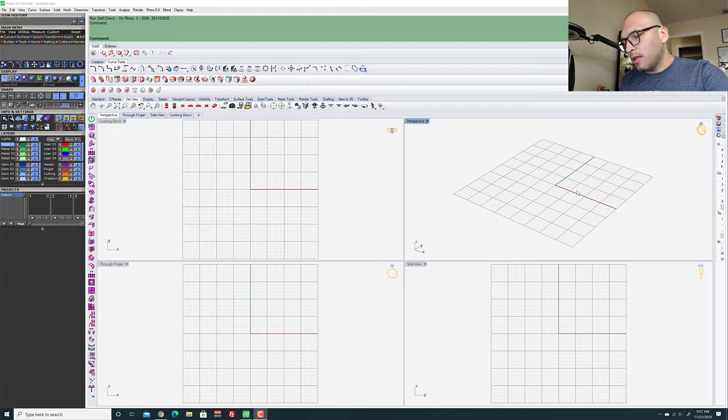In my case, this is going to be a real job that I have to do for a client. What he wants me to do is copy this Hamsa, and they're also going to use different size stones from the original.

So the first step I did was to take a good picture of this with my cell phone with good illumination, and then I send that picture to my computer.

So what I'm going to do now in the matrix is bring the picture to my looking-down perspective, so I can start drawing on top of the picture. I'm going to go to View, then Picture Frame, open a window, and search for my folder where I put the picture of the Hamsa.

I use a program called AirDroid because my cell phone is an Android, so I can send anything from my phone to my computer. Here it is.

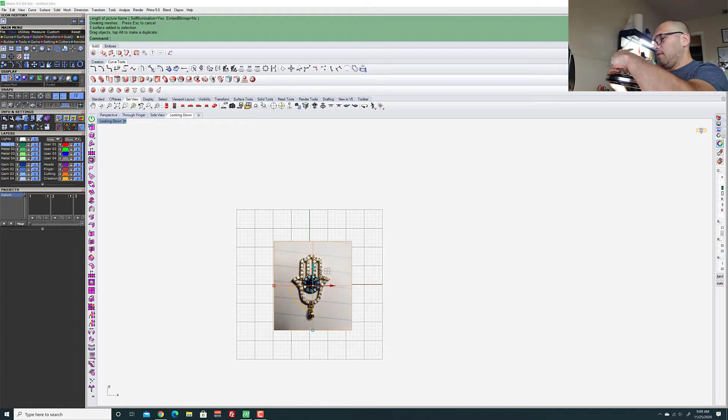And now I'm going to measure this piece. Okay, let me turn this light on. Okay, so this piece is 23.20 millimeters. I'm going to write this down.

23.20. So what I'm going to do is put a line over here, and that line is going to have that size, 23.20 millimeters. Enter, and I press shift on the keyboard and click to finish the line.

So now, selecting the line, I'm going to type a command, and the command is align. Enter. I'm going to align that line horizontal to the center, so I put 0 there. When I press enter to repeat the same command, I go to vertical center and press 0. So right now our line is in the middle of our working space.

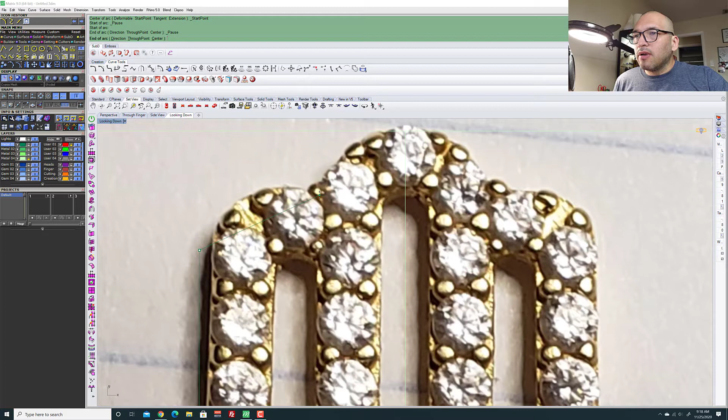So now I'm gonna use maybe the arc tool. I'm gonna place it over here and I'm gonna finish it around here. Yeah, I think that's not good.

Okay, I'm gonna unlock the picture one moment, and I'm gonna move it over here just to make this match. Okay, here we go.

I'm gonna enable control points right here, selecting the hand. So I'm gonna move this point, make it a little higher.

Right there. I'm gonna go to arc again, and I'm gonna start around, let me see, around here, yeah, and finish here. Something like that. Okay.

And I'm gonna move the hand again, so I have to unlock the layer, and I'm gonna try to put this line like in the middle of this hole over here, so right there.

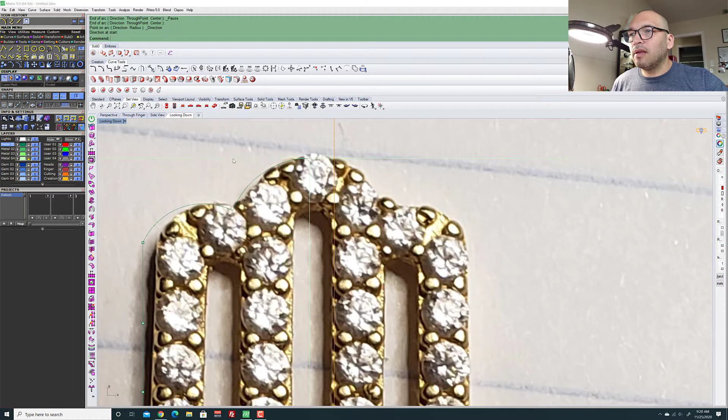Okay, so now that we have this, I'm gonna hide the picture. I'm gonna start working with this. So you see this border, in the picture it finishes pretty rounded.

So to do that, I'm gonna take my circle tool and enable tangent, and I'm gonna start from here to this curve over here. So it's gonna be something like, yeah, like that, and enter.

I'm going to select all these curves over here, and I'm gonna take the trim command, and I'm going to select this one, so I'm gonna click it, and click here. I want this one out and this one out, and yeah, that's good. So I'm gonna press enter to end the trim command, and I'm gonna take join, so I can join all those curves over there, so it can be only one single line.

Okay, yeah, I think I'm going to select the rest of the curves, and I'm gonna take the same command, join. So now I got 4 curves joining into one open curve.

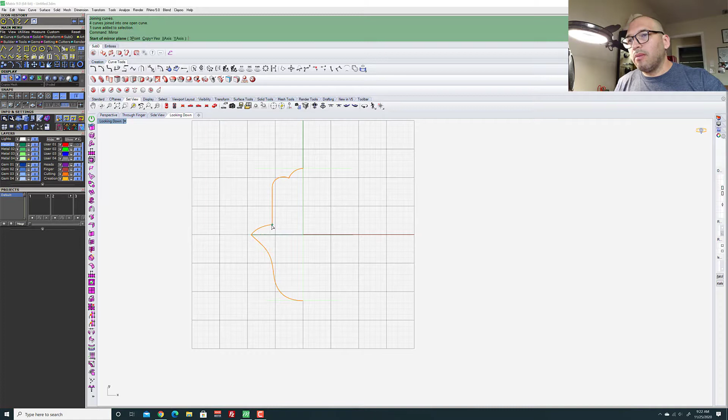And now I'm gonna take mirror, so I'm gonna mirror this left part to the right. So it's asking me for where do I want to start. So I'm gonna start over here at the end of the draw that we already made. And I'm gonna press shift and down and click to release.

Now I'm going to select the 2 curves and I'm gonna join. So now we're gonna get a closed curve.

So if Rhino tells you, if you did a join and it tells you that 2 curves joined into an open curve, then you're gonna have an error, because when you are going to make the solid, since the curve is not closed, it's not gonna be a solid, it's gonna be a surface.

So for example, let me do Ctrl+Z to go back, and I'm gonna move this one. So I'm gonna show you an example. For example, I know that right there is open. So if I join these 2 curves, they're gonna join into one curve because they're connecting down here where I have my cursor.

So it's not going to be solid because it's open in the middle finger. So when I go to solids and make the extrude curve straight, it's going to do it. But you see, it is a surface, it's not a solid.

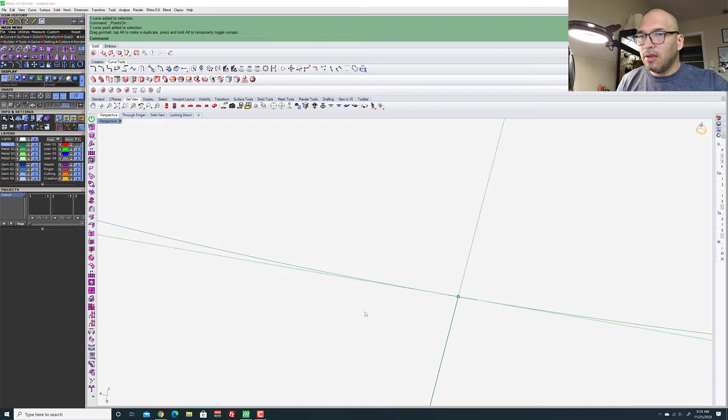Why? Because here we have this part that I didn't close. So I'm going to close it, press F10, take that control point and move it to this control point, and now it's joined. So if I do the solid again, I'm going to see that now we got a solid part. There it is. Okay, let's do the inside.

Because, like I told you before, the stones the client wants to put in the Hamsa are a little bigger. So I'm going to start putting in the stones in the borders to see how much bigger they are compared to the one in the picture, and maybe we have to make a little bigger the draw that I have over here.

So I'm going to take this round one over here. The size the client gave me for the diamonds is 1.6, so I'm going to set it to 1.6 and press this little green arrow here. Okay, it's already in our workspace. So I'm going to move this to the border, and bring the picture on.

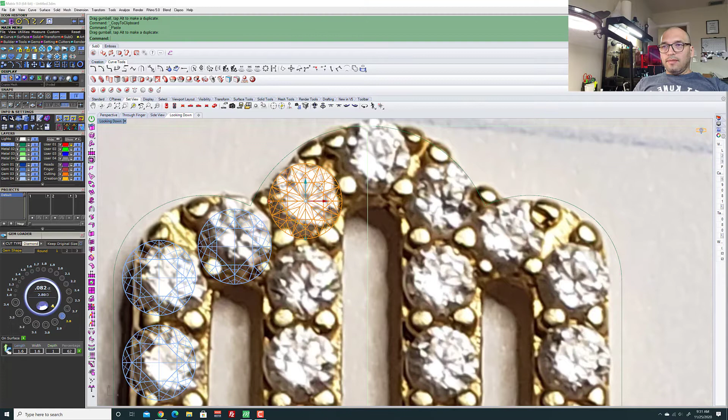Okay, so Control C, Control V, and do the same for the other stones. So this one, I know this one is in the center of the Hamsa, so I'm going to put a line in the center with my center line that I made.

Okay, also I'm gonna show you, after we finish the hand, how to do a rendering in KeyShot.

I'm losing space here, but I can see that the stones in the picture are pretty tight, so I'm going to check the piece. Let me search for my loupe. Not this one, I got a jewelry one.

Okay, let me check this one. Yeah, just these two diamonds over here are pretty close, they're almost touching each other. So maybe I'm gonna leave it like that, I will see.

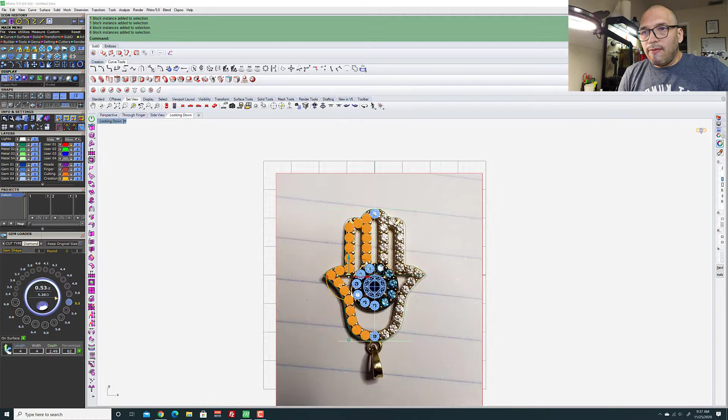So yeah, now I'm gonna select all the stones on the left side of my drawing and set them for the one in the middle. Also, I'm gonna use a group command, making just one group with all these stones, and then mirror. I can press 0 because I know my drawing is in the middle of my working space, and press shift, and there it goes.

Okay guys, so this is a very good technique, because now I'm going to group them - if I need to move this diamond, it's going to reflect on the other side too. This is going to make my life much easier. See, wherever I move that diamond, it reflects on the other part.

If this didn't happen to you in your program, it's because you don't have this history enabled over here, so you have to enable this tree for this to work. It's recording everything I'm doing, and what I mirror to the other side is going to have the attributes that this part over here has.

So if I do something in the original part, it's going to do the same in the other part, except for the curve, because this one I already joined it, so it's not editable anymore. If I enable the control points over here, let me hide the picture. If I move over here, nothing is going to happen because I already joined it, so I lost the history right there.

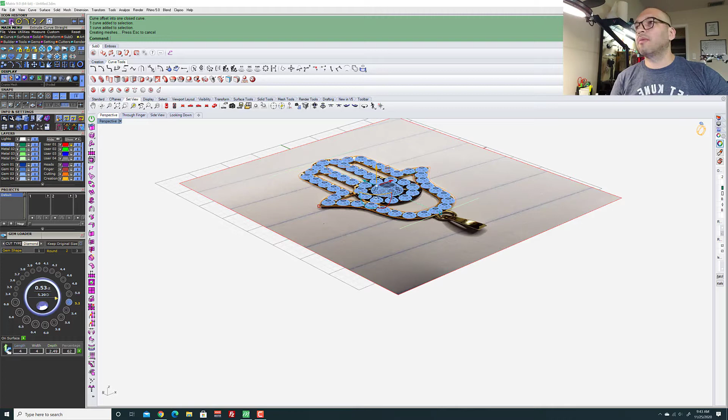I'm gonna go to - I got an icon history over here, so I already used the Extrude Curve Straight command, so I'm gonna use that again. It's going both sides all the way up and down, so I don't need that, I need to go only to one side. In the command menu options, I'm gonna change 'both sides' to no, so now it only goes to the side where I put the mouse. I'm just going to take a minus one and enter - okay, it went down, it went negative.

Okay, so I'm gonna hide the picture, and I'm gonna see how the stones look right there. So yeah, I got a little metal over here, where I'm putting my cursor, so yeah, I'm gonna edit this part.

So I'm gonna select the curve, and I'm gonna press F10. So yeah, you see why you have to simplify the control points, because when you have to do this, you have a lot of control points, and then you're gonna say, oh no, I have to edit a lot of control points.

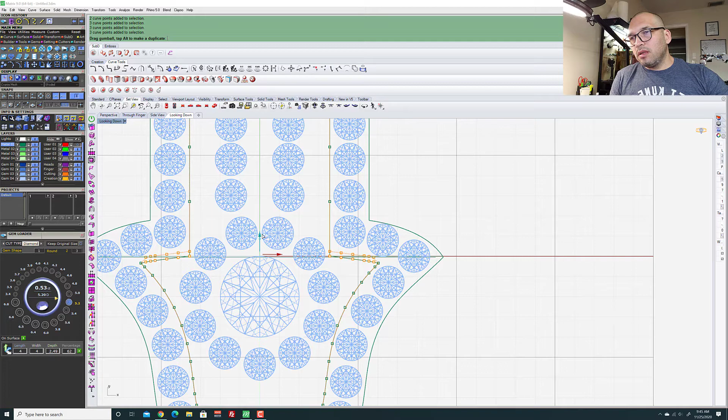So yeah, I didn't simplify this one, but it was the outside, I think, so this is a projection of the one on the outside. To make it easier, I'm just going to select all these control points, and over here too, and pull the arrow up, something like that, because here I have to leave a space for a prong. Also I need to put a prong over here, so this part looks weird, so I'm gonna start playing over here - I'm gonna delete this one and the same here, so they look the same.

But here I got this - yeah, this corner over here looks different from this one, because the control point that I got over here was the one making that shape over here. So I'm going to go Control C.

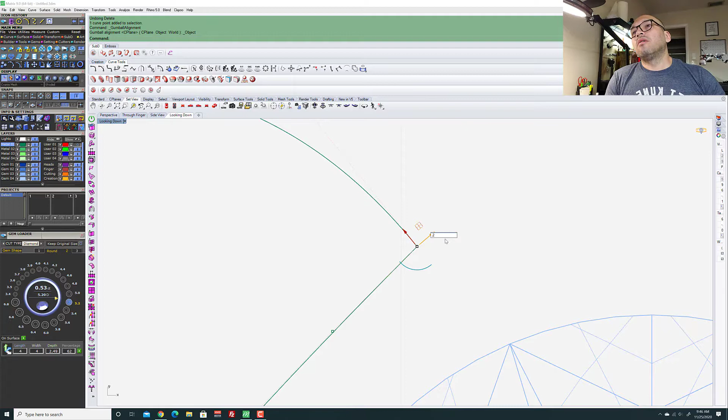Now I'm going to pull this one up, but I need to change the way the arrows are pointing. I'll go to this little sphere over here, which shows me the menu for the options of my gumball. I'm going to click that and say align to object. Now it's following this line over here, trying to follow this line that goes to here. I'll click it and tell it to go all the way up for 0.2 of distance.

So there it goes, and I have a space for a prong here. Let me see the picture. Okay, so you see it's only a single prong in there, so I got a lot of space there.

So I'm going to do the same over here. I'll select, click the red one, and go minus 0.2, 0.2, and enter.

Now I'm going to take this close to here. What I'll do is select this one, maybe these two, because here is close to the border, and I'm going to give around - let's see - click this arrow and go 0.1 maybe there.

Same for here, there, and also 0.1, there it goes. And over here, let me see the picture. Okay, we got this round here and a straight line all the way down.

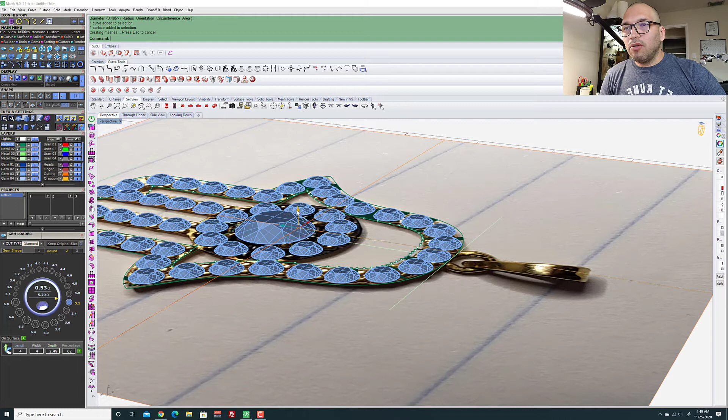So I'll click right there. Okay, and I know the circle is there, it's like behind the picture. So when this happens that you don't see the lines or the control points, just unlock your picture and go to perspective, and from the gumball put it a little bit down like there, lock it again, and from looking down now you will see the whole thing. I think I moved the circle too, so let me see.

So what I should do here is I have two options. I can go from looking down and go to transform and Project to CPlane command, and say Delete input objects yes or no - yes, because I don't want two of the same circles, I don't want the circle to be repeated. You know what I mean, repeat. And now it sends the circle to the zero in our work area. So now what I'm going to do is make this circle solid.

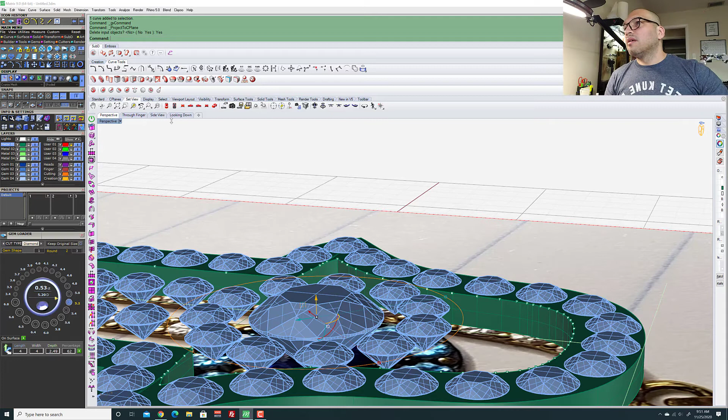Let me see. Okay, the circle in the halo that's going to make the halo is also 1 millimeter. So I'm going to go to Extrude Curve Straight, click the command, and minus 1. So now we got the circle there.

And now we're going to work with the fingers. I'm going to start making the fingers. So here what I'm going to do is straight lines also. I'll start, needed to start from here. So what I'm going to do is a guideline here to around here, and now over here I'm going to enable near in the snaps menu, and I'm going to select single line.

I'm going to go around, yeah I think, and around here. I'm going to enable both sides with B on my keyboard and enter. I'm going to go with Shift, pressing Shift. I'm going to click it right there. I think this is too tall, so I can go with the gumball, put it down.

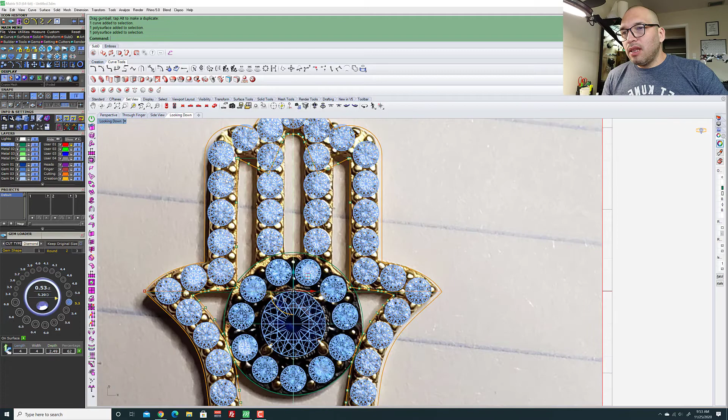So what I'm going to do is select, going to disable the control points. I'm going to select the inside curve. I'm going to put the gumball in the center, so align to CPlane, and there are these little squares over here, so I'm going to select any of these two, and press Shift on my keyboard, clicking the square curve, and move a little bit bigger the inside line, like around there. I want it to be close to touch the diamonds, like almost in the border of the diamonds you see over here. Okay, that's better.

And now the outside one, I'm going to do the same, but in the contrary, I'm going to reduce to scale that drawing. So I'm going to go inside, select pressing Shift on the keyboard, so you go uniformly in all sides - yeah, not size, side.

It's doing the same from left to right, from up to the down part to the bottom. So you see over here. Now I don't have metal in this border, so I'm gonna enable the control points and fix that. Also over here, I'm gonna take this diamond down.

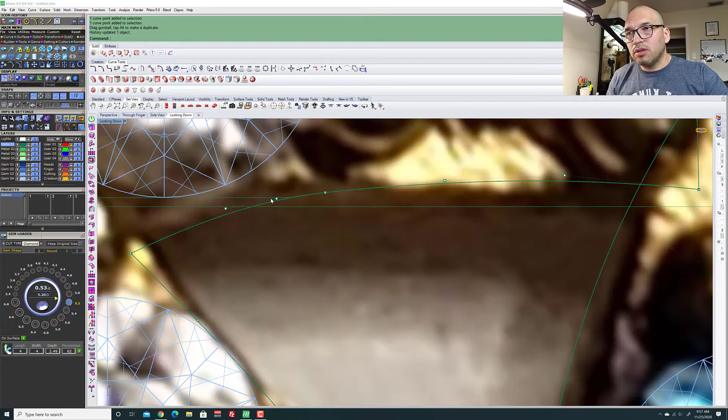Yeah, maybe this one and this one and these two, down like that. This one and this one a little up. Fixing the shape over here. Maybe I can delete this one and this one. See? Yes, that looks very nice.

Okay, over here I'm gonna enable again the control points. F10. Select the curve and F10. Again F10. I'm gonna take these 3 control points and bring them up there. Let me see the Hamsa. Yeah, just like that.

And what else? Okay, over here, let me see what I got in this part. Yeah, you got a lot of bad job in that part in the original piece. You can see like they put a screw there maybe for the casting and they left a little piece of the screw right there. Or maybe they soldered - they put something there, it's a little piece of metal. So I don't know what happened.

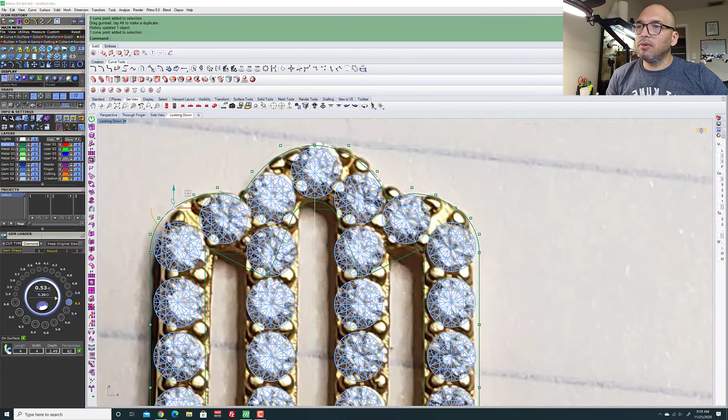This, I think I want more round, because maybe moving this point over here, this one over here. Always check if the gumball is in the middle line. I always trace a middle line, so I have a guide to know that I'm working uniformly on the 2 sides when I don't have the history working. So I'm going like that, and now these 2 guys over here a little bit up.

Okay, let me hide the picture. Okay, this one go a little bit up, a little bit up, just like that. Yeah, I think that's good. Okay, so now I'm gonna move this one over here, like in the middle of the stone over here. Okay. Yeah, I think that's good.

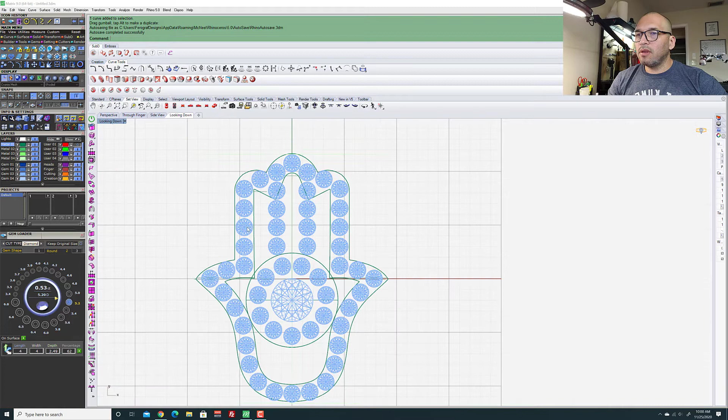Okay guys, so now I'm gonna draw the lines that are gonna go all the way down. I'm gonna use this part of the hand also. So I'm going to have to delete the solid that I have right now. I'm gonna use the single line, clicking at the end of this line over here, and go all the way down, entering the circle over here.

Okay, let me see the picture again. And I have this curve over here. So let's do the one in the middle. I'm gonna go for the single line again, and go the way up over here, or maybe - okay, let's trace it from here inside the circle, and I'm gonna mirror these 3 lines. Mirror from 0, enter, shift, and click.

Okay, so now I'm gonna hide the picture. I'm going to delete this border of that frame of the hand. Looking down, I saw a problem over here, so I'm going to correct this.

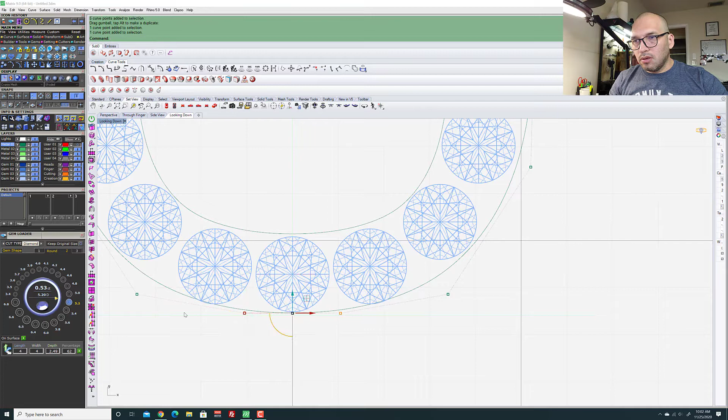That's going to pull those control points. I'm going to take a little bit down. These two control points, I'm going to take it out from the middle. I'm going to open it. And I'm going to take a little bit down again, and right there. That's a good one.

Okay, so now we're going to start trimming. I'm going to start to trim these corners over here, so I can take out what is left. So trim command in the keyboard, enter. I'm going to delete this one inside, I don't need this one anymore. And this one and this one.

So always zoom in the curve that you trim, because sometimes there is a little excess of a curve, and it's so little that you don't see it, and when you're gonna do a joint or something like that, you're gonna have a failed joint. So enter, I'm not gonna join this one because I have to do an arc over here and here.

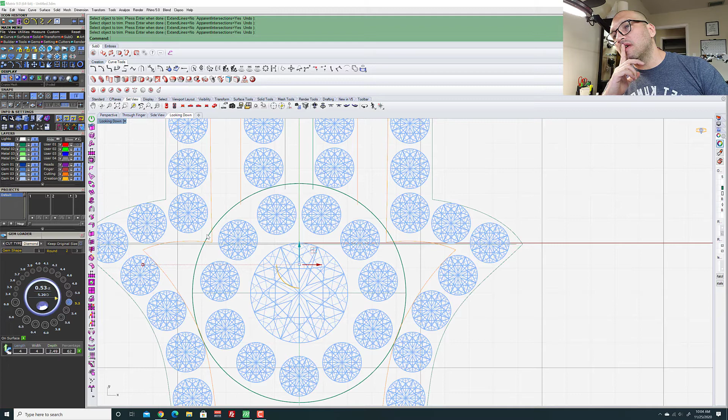So I'm gonna join this circle with the shape of the hand too. So yeah, I'm gonna have to delete the solid in the circle too, but I'm gonna finish here the angle. So what I'm looking right now is that I have to make this line a little lower to make the arc over there.

So I'm going to select everything over here. I'm going to press F10, and I'm just going to select the control points in the left and in the right. Put a little bit down. Okay, yeah, I think that's good. And now I'm going to do the same over here.

F10, select the control points, I'm going a little bit down. I'm trying to go the slowest that I can do, explaining these things, so you don't have any doubt.

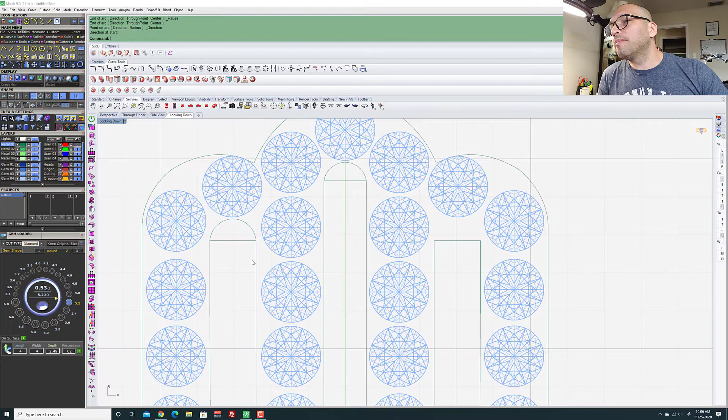And let's make this one over here too, the middle finger. I think there. Okay, so let's hide the picture. If you see here, there is an angle that I need to delete.

So how I'm gonna do that? I can do the tangent also, but that's too much work to do. So what I'm gonna do is first I'm gonna mirror this to the right.

Okay, now I'm going to select all the arcs that I have made. I'm going to select the lines that went down to the circle of the halo. I'm going to join all this into one single part.

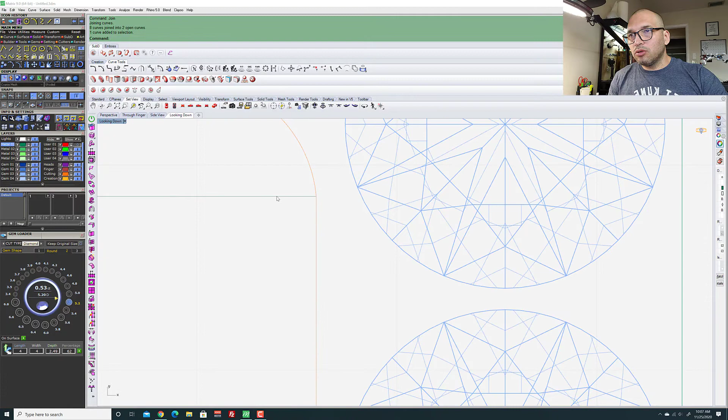So join. So it says I have two open curves, this one over here and this one in the mirror. Okay, so I don't need any more these guidelines over here. Okay, maybe this set of stones I can move it a little bit right there.

Nice. Okay, this prong over here is gonna be very tight, so I'm going to try to fix that, because the thing when they tell you to copy something, you don't have to copy the errors that they make in their design. So you can fix it in the new design, even if you're copying something, trying to do it better than they did. So remember that, guys.

Okay, so now I'm gonna fix this little angle over here, but it's not notable to the eye, because you see this piece is small. It's 23 millimeters, so you're not gonna see that over here.

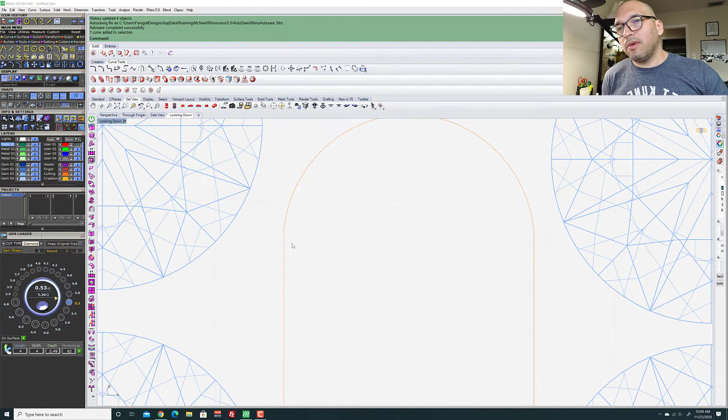So I can delete that angle or soften that angle, or I just can leave it like that. But I'm going to do it because I like to be a little perfectionist. So how I'm going to do that is I'm going to select maybe these two, or I can delete these two over here. So there is no angle now.

See? I'm going to do the same over here. Now we don't have no angle. And I can push this a little bit bigger, because I noticed that when I delete those two control points, it reduces a little bit. But this size is not notable in the end piece. You're not gonna notice the distance of 1 millimeter. It's a micron basically.

So yeah, there and there. I think this one is smaller than this one. Oh yeah, so I'm gonna fix that too. That's why I moved the diamond, because I want it to look the same size as this one.

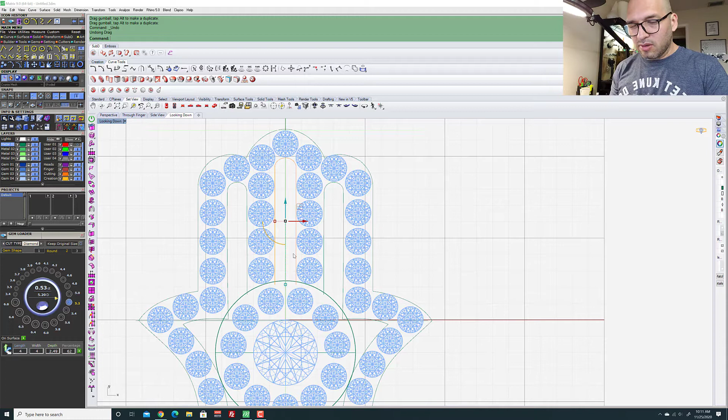Okay, Control Z to put it back where it was, and I'm gonna put it side by side to see if they're almost the same size. Let me see the one over here. The one in the original is a little smaller too, so you can see that it's almost close. It's not too much difference there, so I'm gonna leave it like that.

And now I'm gonna work with the circle. So I'm gonna delete the solid, and looking down view, I'm going to join the circle with the hand.

Oh, sorry guys, let me have some water. Okay, give me a moment. Okay, here it is.

Okay, so I'm gonna select all those lines that we did for the holes of the fingers. This is the separation of the fingers.

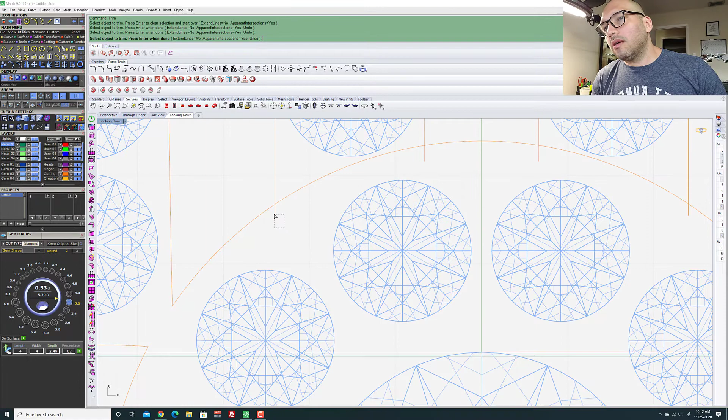Okay, I got everything on the inside, so I'm gonna use the trim command again in the keyboard, enter, and I'm going to delete this one and this one. I'm going to delete this one over here, delete all the ones that are touching or intercepting. I'm going to delete this one, okay, let me see this one.

So these ones that you see that are closed are the ones that are going to make the hole when you make the solid. So for this one, I delete a line over here, I got a line, so not a problem, I'm not using that line anymore. Okay, here I went wrong, I deleted the one line that I shouldn't delete.

So here you got the option to undo what you did. Okay, so I undid that one, it was this one, I think, yeah, over here, and these two, this one, yeah, that's all.

Yeah, looks the same. Okay, so enter to end the command string and type join, and pay attention to the result of the command. I don't want anything to stay open, everything has to be closed. So I got 12 curves joining into 6 closed curves, so we're doing great.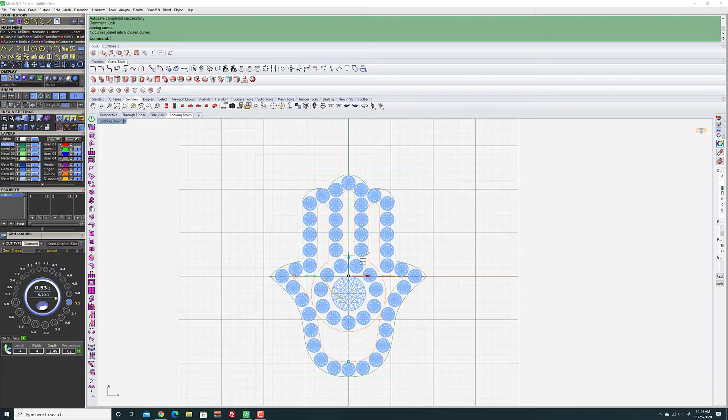Now I'm going to select the outside, pressing shift because I already have in my selection the ones that I just trimmed. I'm gonna click the outside, I'm gonna go to perspective to see what's going on, and I'm gonna go to extrude straight. Click it. Already in the option menu of the command is already the minor one, the left one. I'm gonna press enter, and there it goes.

We got a Hamsa hand right there. Now we haven't finished. We have the tricky part, the prongs. The prongs are the ones who are going to catch those stones in place. So here, I'll show you.

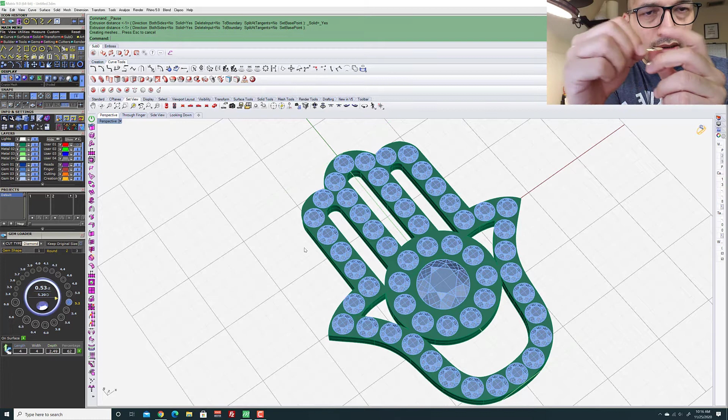Here we have 4 prongs for the center stone, and you see we got sharp prongs for the little ones, and also we need to do this border over here to give it more height to the piece, and we have to pass the holes all the way to pass the metal, so the stones are gonna have light and they're gonna shine. That's how you make a diamond or a stone shine more with the light, because they have all these cuts in the stone and they are made to catch the light and make it brighter.

So okay, let's start with the prongs first. So I'm gonna go to the gems menu, the main menu, hmm, gems. Sorry, it's not gems, it's in the cutters. I'm gonna go to the cutters menu, and here we have the hand colors. That one are the ones we're gonna use to pass through the metal.

But now we need to set the prong, so I'm going to go to setting, and here we got prong on surface, so we're gonna use that one. So when you click it, you're gonna have this option bar over here.

So here in this box it says surface, so I'm going to select the hand, the solid hand. Also you can do that on a surface, but now we got it as a solid, so I'm going to select that one and put it in the arrow. So it's going to put the hand inside the box. Right there it is. And now we got a prong playing on top of our hand.

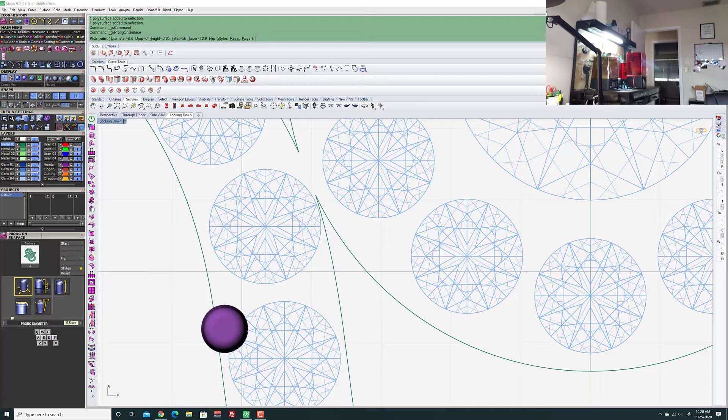Okay guys, got energy. So, where we was putting prongs. So yeah, this is the drop of the prong, this is how deep it's gonna go in the metal. So always check that out, because if you leave it at 0, it's for sure the prongs are gonna stay in the air, so when you print it, you're not gonna have any prong on it. So always go - I usually go to 0.2 millimeters.

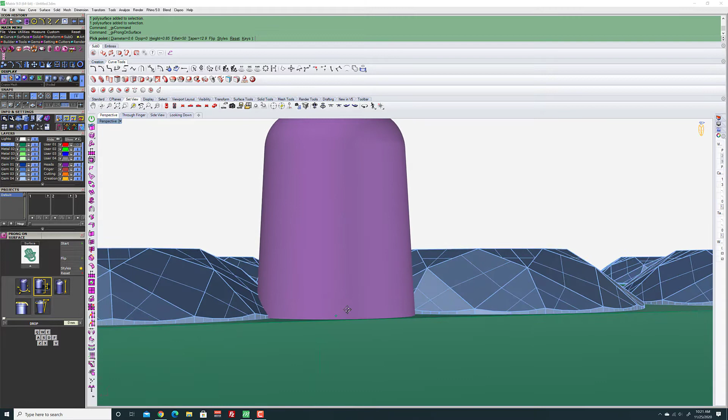So let me show you what it's doing when I do that. So it was at 0. Let me do a trick over here. Oh, it didn't work, okay let me go something like in this border. Okay, there, come on. Okay, there it goes. So I'm gonna go over here and show you what it's doing. So it was at 0, so you see that the prong disappeared. Okay, so here it is, you see that's in the 0 position, so it's on top of the surface, not even touching the surface - you can see there is like a little line there.

So I'm gonna go to 0.2. So the prong is going down, it's putting metal down like as you see over there, and I just put a prong on the surface. So I'm gonna do this again.

So okay, so we got metal of the prong inside the Hamsa hand, and this is the height of the prong - it's too high, it's too much metal over there. So I'm gonna take this down to 0.55 maybe, let's see - I think that's good.

That's good, because I know this line has those prongs a little bigger, because sometimes they do rubber molds and they reduce, etc, or sometimes they use stones that are not in the same size - sometimes a little bigger, a little smaller, so it's better to have a good prong. And the rest, this is like the shape of the top part of the prong, and this is like to make the prong like a cone or more straight. So yeah, that's good.

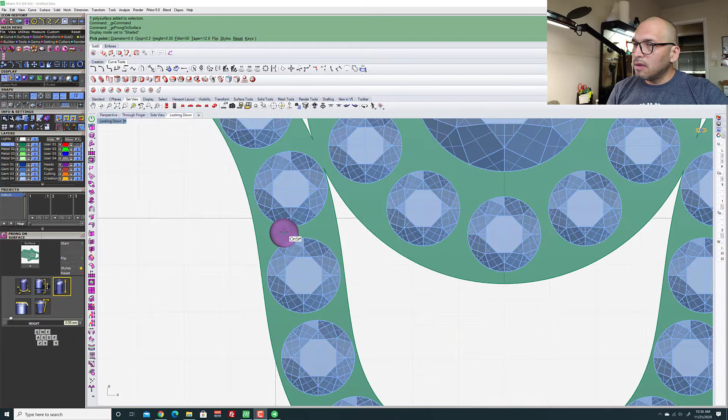So okay, so now going to start setting this prong. I'm gonna go to the Looking Down menu, I'm gonna change my view to shaded so I can see more clearly where I'm going to put those prongs.

I'm going to start here. Also, Matrix has a tool that can put the prongs automatically, but sometimes it doesn't work pretty good. So I always like to put them manually, so yeah, let's do it.

I'm gonna leave you the photo of the Hamsa in case you wanna recreate what I'm doing here. Remember, just put the prongs close to the border, because what the stone setter is going to do is close the prongs to catch the stones. So maybe these stones over here I'm going to move a little bit to the border, because in this part there's less space to put the prong.

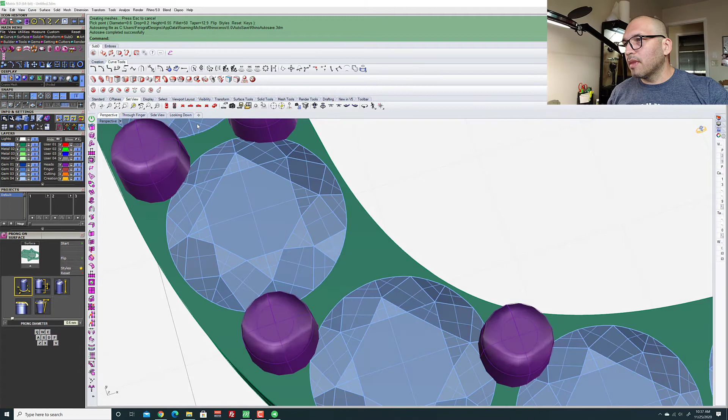Okay, what I can do here is, let me see. Okay, I'm gonna Control C, Control V with these prongs over here. Okay, right there. Okay, let's move this over here, over here. That's good.

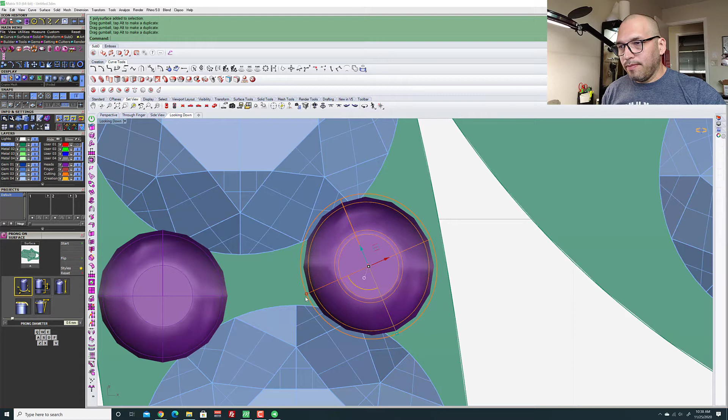There's a lot of space here, so maybe I'm gonna make that prong a little bigger. Here. Here. There. Okay. So this one. Okay, nice.

Okay, this is the one that is a single prong, so I'm gonna put some metal on that prong when I share 3 stones right there. Something a little bigger - let me put the one in the corner to see how it fits. Okay, so right there, and this one a little bigger, a little thicker. That's good. Okay.

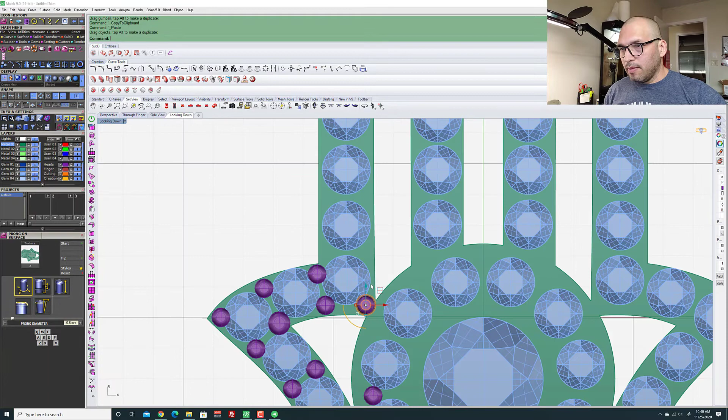So the same thing, I'm gonna do the left part, and then I'm gonna mirror all these prongs to the right part. Here. I'm gonna mirror this one right there - I'm gonna go group, mirror, Ctrl C, Ctrl V. I'm gonna work like that, right there, Control C, Control V. Control C, Control V. Good, I need a single one.

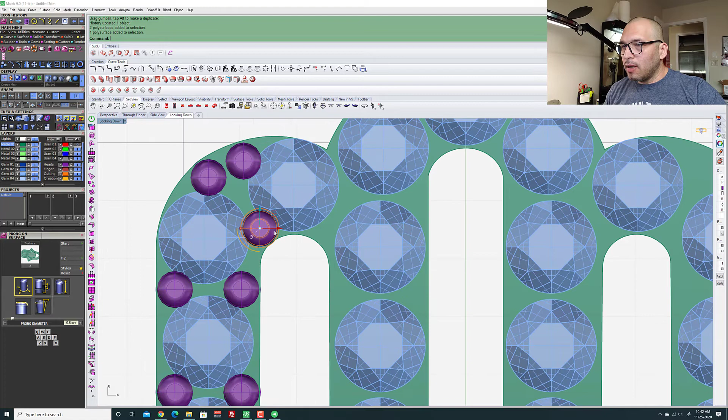Okay, what I can do is just take this curve over here a little bit down. I'm going to take the two curves, because I already made a string over here so I don't have the history. I press F, then I have to select these control points over here.

I think I can go a little more down right there, because I don't want to lose too much of the size of that prong, because if you put a prong too small, the gold is a soft material also, and mostly it's 18 karat gold. It's more soft than the 14 karat gold. The 14 karat is a more strong gold, physically stronger than the 18 karat gold.

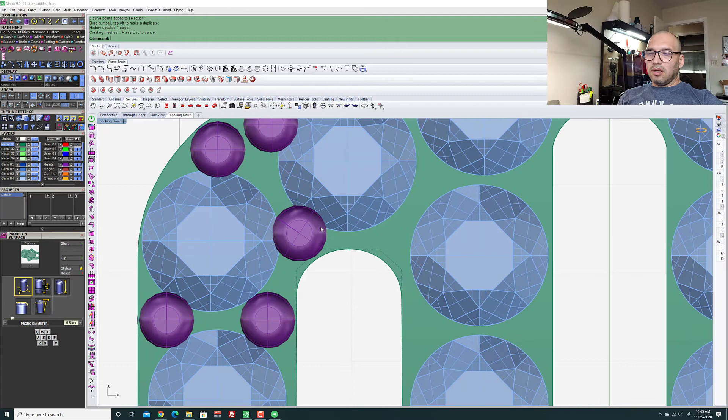So if you put a little prong there that's less than half a millimeter, using it and touching it is gonna make the prong get loose and the stone get loose also. So I better put a strong prong even if I have to add more metal, because this prong is already small, almost 0.6, almost half a millimeter, and these stones are 1.6 millimeters. They're not 1 millimeter stones, they're a little bigger stones also.

I don't want my client or the end user who's gonna buy this to have to take this piece to the jeweler because of a lost stone. So there's some details you have to pay attention to. I think this is good. I'm gonna move this from over here.

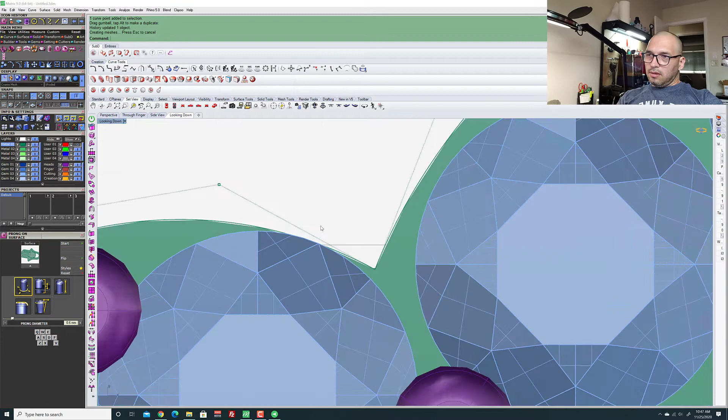Let's put the one over here that's gonna catch the three stones. That looks good, right there. Maybe over here I can give a little bit of metal. I'm gonna catch this control point on this one, go a little bit up. I'm gonna open this one over here and this one over here, like that. Maybe this one, and go higher. So this stone is almost too close to the border, so I want to give a little bit of metal right there.

I'm gonna raise these ones up, right there. Yeah, that looks good, so I can open this front a little bit more. Right there. Yeah, I like it.

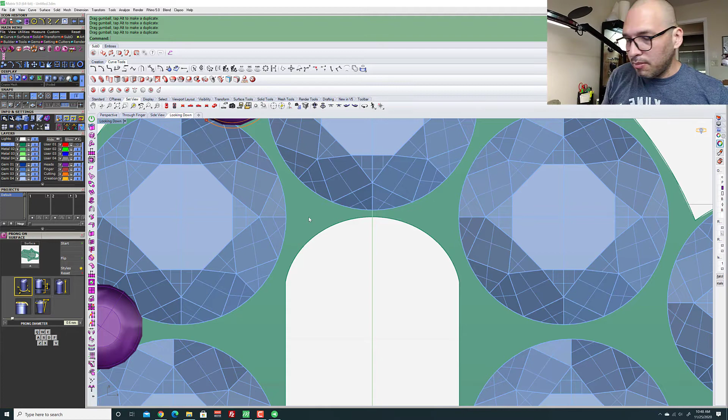Can make this one a little bigger. Oh man, on this one it's very small, a very small front. So what I'm gonna do is check the sample piece, see how small the one in the sample is. Yes, the one in the sample is not as small as I was thinking, so I'm gonna have to work something here, because this front is gonna lose a lot of metal when we set the stone.

Okay, let me see what I can do here. Maybe the same as we did with the other two over here. A little bit, oh, forgot, I didn't select this one over here so it took a weird shape. So in there is good. Let's see. I don't know, still don't like it.

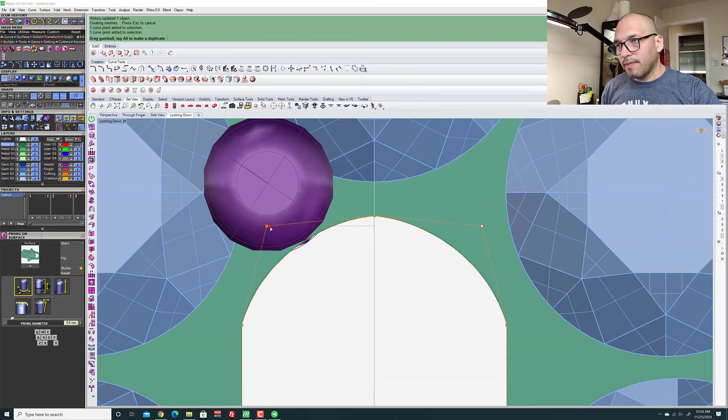Oh my God, there's a lot of metal there. Okay, here. I'm gonna leave it like that, at least we have more metal now than before. Maybe I can close this a little bit over here. Okay, yeah, work with that.

Okay guys, so now we're gonna put these ones over here and we have to go to the halo. Okay, this one. We don't have all this metal here. Okay, this one is good. Let's see what happens here. Okay, I have to move this prong, so I'm going to ungroup.

This a little bit to the left there. Okay, I'm gonna use this one, control copy, I'm gonna copy and paste. So I'm going to ungroup. Here is a little tight space. Okay, let's see. Let's work only with one.

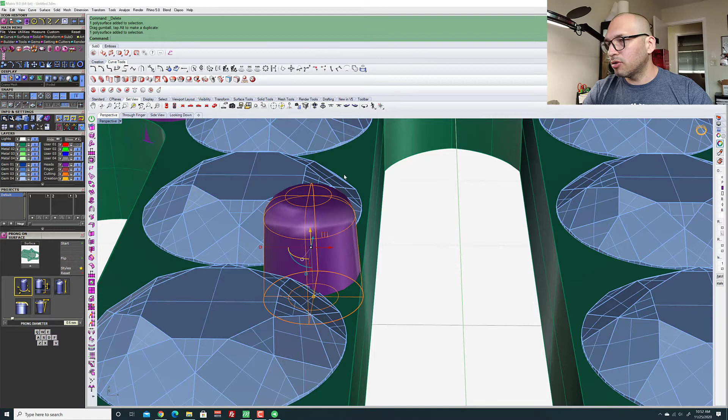Okay, so here I got a problem with the angle of the prong. See, the prong has a little bigger in the bottom part, so I'm going to try to do here a straight prong. I'm going to select my Hamsa, put it in the surface, on the prong surface. This is the prong options menu.

So now I got that prong right there, so I'm gonna go over here where this angle line is at. I'm going to reduce this percent to almost 0. So there, good. You see that now the prong is straight.

Doesn't have no angle anymore, so I can take the prong more to the border. There. That's it. Enter. I'm gonna go a little bit downwards. There, that's good. Now I'm gonna group it. Control C, Control V.

Let me see. Okay, I'm gonna take this more to the center of the stone. Here is metal out of the Hamsa, so you can see it over here. That's not gonna be notable in the gold piece, so I'm gonna leave it like that because they have to polish and clean, etc. Go here.

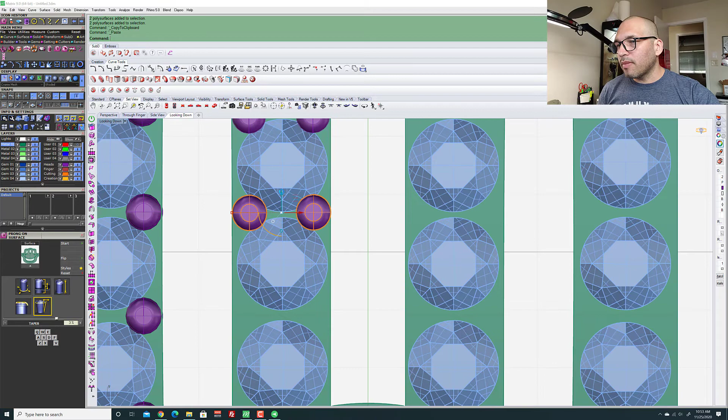Okay, that's good. Okay, we got this part already. We're gonna mirror this to the... Okay, here I think I got a problem. It's supposed to put a prong right there. Let me see. Yeah, so it's a little prong right there.

So I'm gonna do, what we're gonna do here, is okay. Yeah. Oh yeah, it's a big deal here. So I'm gonna take these 2 control points. I'm gonna take it up. Okay, let me see more. I'm gonna close it a little bit. Okay.

So let's set a prong right there. I'm gonna take one of the prongs over here. I'm gonna take it. Wow, see how little space we have there. So I'm gonna take one of the straight prongs that we use over here. I'm going to grab this one. Control C, Control V. Put it there.

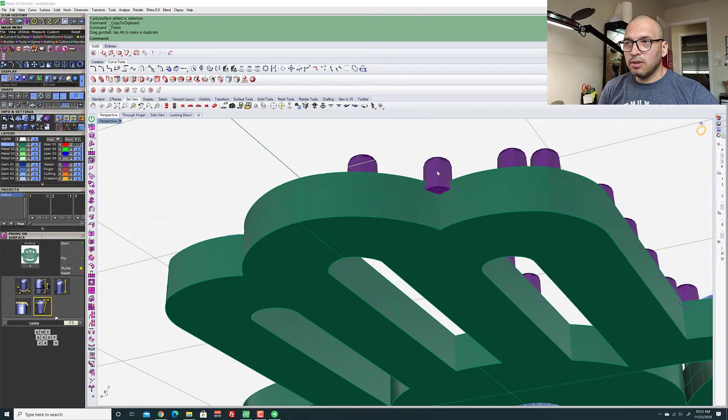Okay, let me see the perspective. How much prong is out of the metal? A lot. Oh my gosh, that's a lot of metal outside the hand.

Okay, going F10 again to show the control points. I'm gonna raise this up again a little bit. Let's see. Okay, maybe you can move this stone to the left a little bit, then take it up. Then a little more to the left and take it up. Okay, right there, I'm gonna move the prong, almost touching the other prong.

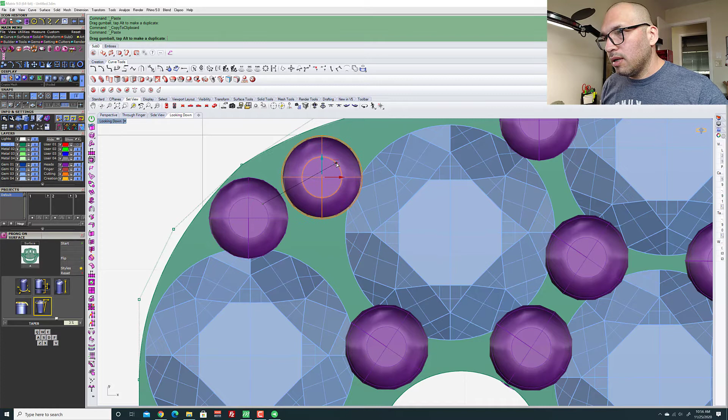Something like, okay, I'm gonna do straight prongs over here too. So let's do the straight prongs right there and right there. Let's do a straight prong here. Yeah, I shouldn't start with the straight prongs because this is too tight a space here to work with.

Okay, but this one over here is good. This one has a little metal offset from the hand, and this one's still outside, so I'm gonna start to bring in this prong. What I'm gonna do with this prong is play with it at a little angle, so the stone setter can play with that. So you see how I move it, because I want to align this part to the outside over here.

So when I go to perspective, what I'm gonna do, I'm gonna use the red - I don't know how you call that thing, but that one is to rotate the piece that I have selected. So I'm gonna give a little bit of angle, but I think that it's not gonna do much.

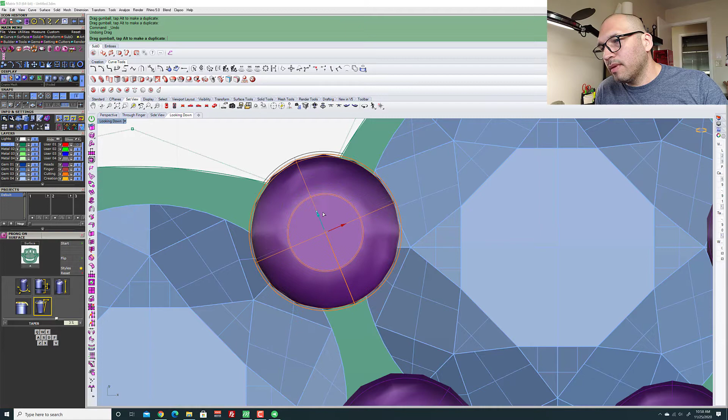Let me see. Yeah, I'm not doing too much over there, so that's gonna bring the prong in a little bit more, because I don't want this part over here to look outside the metal. So I'm gonna do the angle again, see what happens. Okay, leave it like that.

And select the control point again and take that control point out a little bit more and open it a little bit. Let's see. Okay, that's good, I'll leave that one like that. They can fix that, the jeweler can make more shape to that one later, but I think it's gonna work really good.

Okay, it looks weird, man, but they're gonna push the prongs. So if you leave the prongs like this and the stone is in the middle, how they catch the stone is that they close the prongs to catch it. So that angled prong, they're gonna do pressure on it to catch the stone. So when they finish, now they're gonna look like that angle shape.

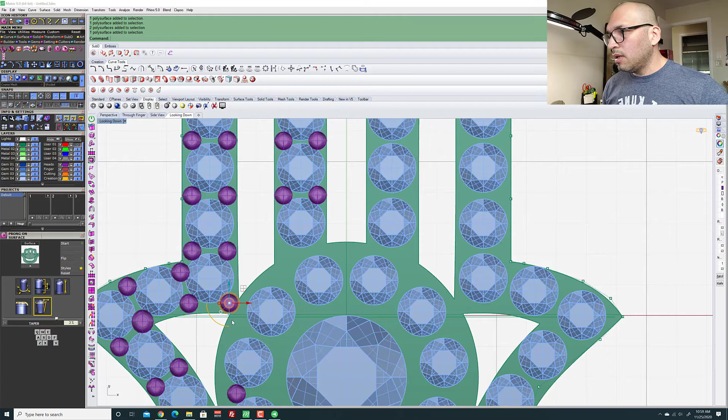Okay, so we are missing prongs here, so let's do it. Here I'm gonna work with the normal prong because I have a lot of metal space there. So I'm gonna put only one here. I'm not gonna touch this stone over here, but this one I'm gonna touch.

So for this part, I'm gonna bring a straight prong angle - a straight angle prong, I mean. Okay, so I'm gonna put it. Need it more to catch this stone than this one, because this one I'm gonna have texture also here.

So yeah, basically that. Now I'm going to bring one here. What I'm going to do, because I have too much metal space here, is go a little bigger with this prong. Maybe like this, because what I can see is that the center part looks with more metal than the borders that make the shape of the Hamsa, the hand, I mean.

So okay, this one is okay. Now I'm going to take this small one over here.

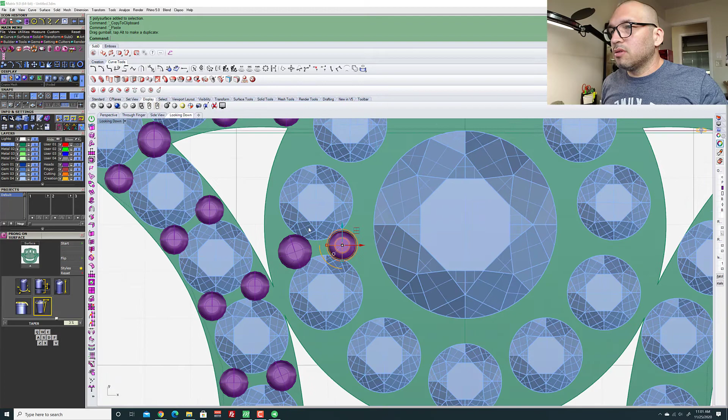Okay, so there is a command, array polar, in Rhino too, that lets us array or repeat prongs all the way around. So I'm going to select these two prongs, group them, go to the transform menu, and click array polar. You have to have these two selected.

It's telling me what is the center of the polar array. So the center is going to be the center stone. Remember that it's not in 0 coordinates, so I'm going to use the center of the diamond, or the end, and click right there.

Now it's asking me for the number of items. So I have 1, 2, 3, 4, 5, 6, 7, 8, 9, 10, 11 stones. So it's going to be by 11. I'm going to take 11 and enter.

And it says it's going to do a 360. I press enter to accept those options. Now it's showing me a preview of how they're going to be. That's good for me, so I press enter and the array polar command is finished.

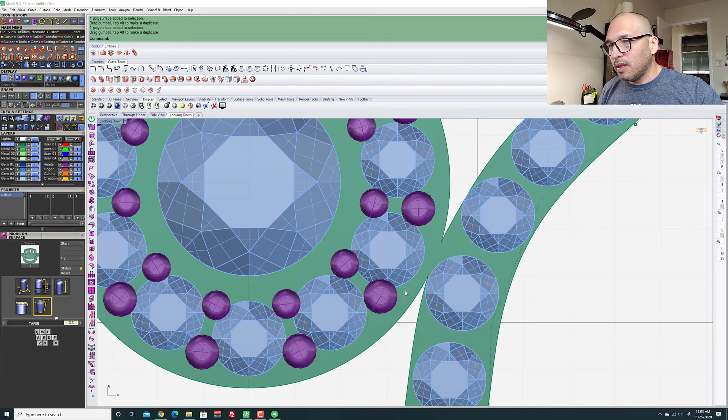But you can see in my screen there is a prong that is not touching the stone. So I'm going to group this pair of prongs and move it manually to touch the stone that is not touching. And there it is. Now I'm going to press escape to hide those control points.

And now I need to reflect or mirror all these prongs from the left to the right. Maybe a lot of you guys are going to select one by one like this, or something like this, but then you're going to maybe catch some drawing lines in the back, etc.

Okay, the fastest way is you go to the layers. Go to the purple one, which is assigned to the prongs, stand over the color, and make a right click on it. So it selects everything that is purple color, and I'm going to deselect this one, the halo ones.

Okay, this one I can go Control Alt and click and draw the rectangle to deselect. Something like this, so it's going to be faster.

And now that I have the selection of these prongs, I can do a group, single group. So now I have all these prongs in a single group, and I can do a mirror command. I'm going to press enter because I wanted to start from the center, and 0, enter, and shift, and click.

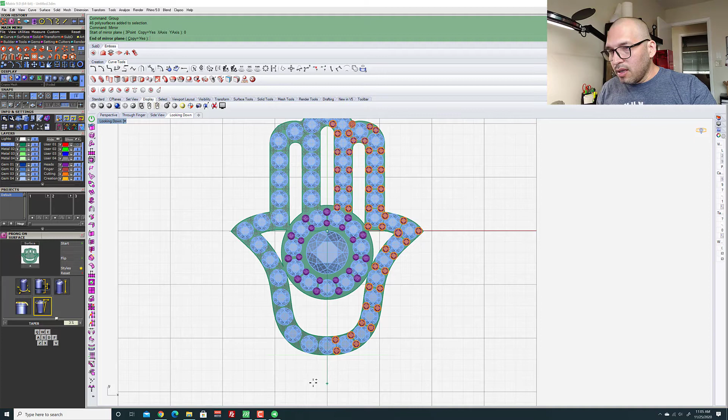And now I want to group these two also. So I make the group. I take group command again, enter, and now I want to group the halo ones.

So what I'm going to do is the same: right click in the purple. I'm going to control and click the ones that are already in a group, and I can do a group with this one, or maybe I can do the whole group with all the prongs. So now they are all in one group.

Also the same you can do with the diamond. You can right click in the color of the diamond, and you can select all the diamonds at the same time. So yeah, let's do that, and group.

Okay, and now we're going to start making the holes, and we're going to make the cutter that is going to make the hole in the metal, so we can make a boolean function in the Hamsa hand.

So I'm going to select all my diamonds and go to the cutters menu. The first one is the gem cutters, so I'm going to select that one. Okay.

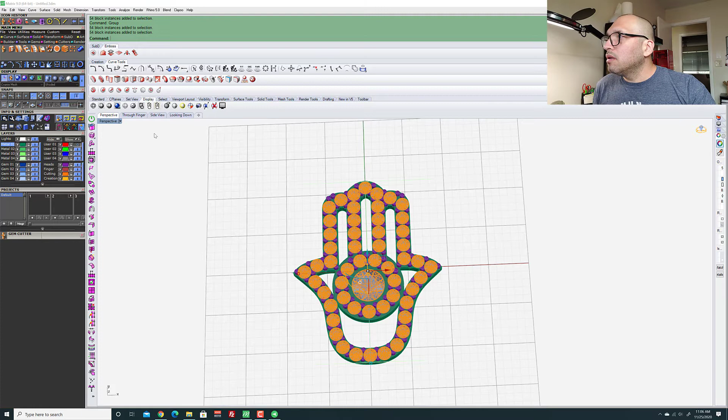Something's wrong with my matrix, so I'm going to close that one. I'm going to select the gem cutter again. Okay, let's see. Yeah, sometimes matrix is a little buggy, so let's do it again. Let's see what happened. Okay, matrix, what's up? Okay.

When this thing happens, I just close the program and open it again, and that will fix it. Or I can use the Gem Cutter library which will bring up a prompt, but the problem is it only works one by one, so that's not going to work. I'm going to close the program.

Gem cutter is not doing anything. Okay, I see something there. What's going on? Let me see. Okay, there it is. I'm going to put the gems in the gem box. Now I've got the cutters right there, and they are passing through.

Okay, this cone shape looks weird. That's because I enabled some advanced features on the gem cutters. I'm going to turn this up. There you go.

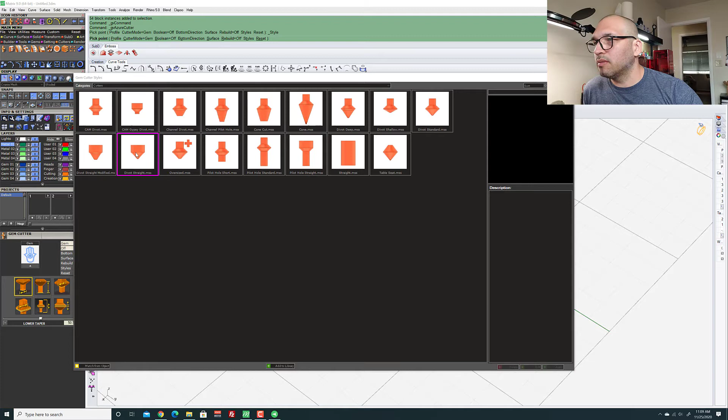For those who want to know how much you can do with these cutters, let me show you some things. Matrix has a database of different styles over here where they start. When you click it, it shows you this box with all the data they have. This one will not pass through the metal side by side — it's only a superficial hole, just to fit the under part of the diamond. So I'm good with the one I have right now, I'm not going to change it.

Also, if you turn up the gems option over here and enable it, this lets you change the shape of the hole that's going to be made in the part you're making. If I click this profile, it shows me a database with a lot of drawings you can adapt. You can also make your own and put it in here, just by going to edit. If I select this square one, look how it changes over here — now we've got a square shape. So you can customize the hole you want to make in your piece.

I don't want that either, so I'm going to change my profile back to round, and I'm going to turn this up to gem.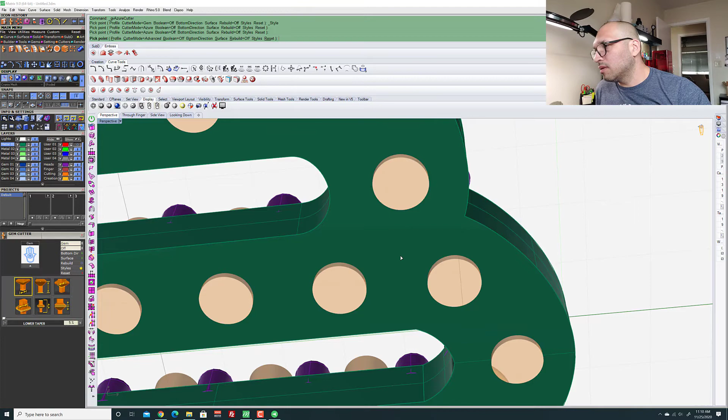Matrix tends to get slow when you have a lot of stones and powders — it starts to go very slow, so you need a powerful computer. When you do a piece with 100, 200, or maybe 1000 diamonds, it's better to work in another program, really, or maybe copy the diamond to Rhinoceros and work only with Rhinoceros, setting your stones and everything — it will be faster. Also, I know MatrixGold is faster than this one. I already tried it, a friend bought it, but maybe because I don't use it I didn't get used to the menus, they're a little different. But it's pretty fast, it opens like this, super fast.

So I'm going to press enter to accept this cutter. Now I have all those cutters right there. I'm going to select the hand, go to solid, and go to difference over here — this makes a volume difference. So having selected the piece you want to cut, click there, now click the cutters, press enter, and we've got a hole right there.

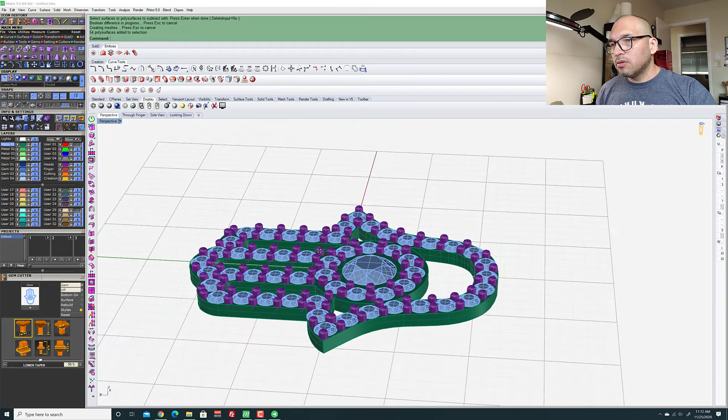So I can delete this one or just put it in another layer and hide it. I always like to conserve the tools I use, in case later I need to edit something, or so I know what tools I used and what size they were.

So now, next step — okay, the next step is I'm going to go back, Control Z, because I want to raise those stones, the center stone, a little bit. So I'm going to ungroup all the cutters. Now the piece is solid with the Control Z. I'm going to select this one and this one, and ungroup the stones too. I'll select this one and the center stone again, and raise it about 0.2 millimeters up.

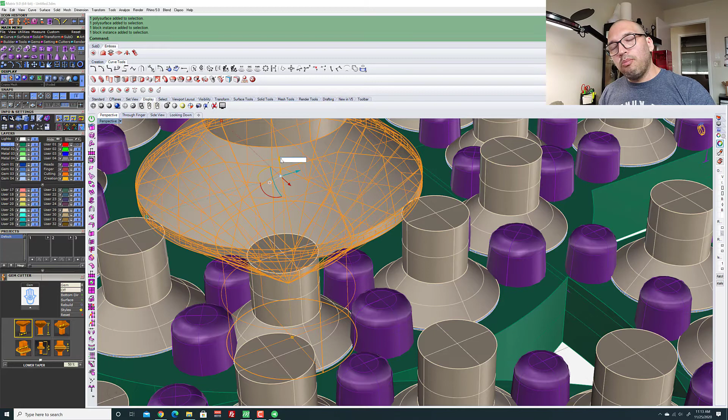Okay, I'm gonna go a little bit higher because I don't have too much metal for that stone, so it's gonna open me a big hole in the metal, and I don't want that. So I'm gonna go a little bit higher, like another 0.2, no, maybe 0.3. Let me see. Okay, that's good for me. That's better, because also the stone is going to be a sapphire, and sapphires are not perfectly cut.

So now I need to select again all the cutters, and they are ungrouped. So I'm going to right click over the cutter and group it, and select the Hamsa. Go again to difference, select the cutters, enter, and you can hide the cutters or delete the cutters.

And there it goes. Now we need to do the final step - not the final, because we still have this little ring that we have to put here to put the bail. You can see it right there. I have to make that one too. And the next step is gonna be how to make this border over here. Okay guys, so we got a drawing line over here, right?

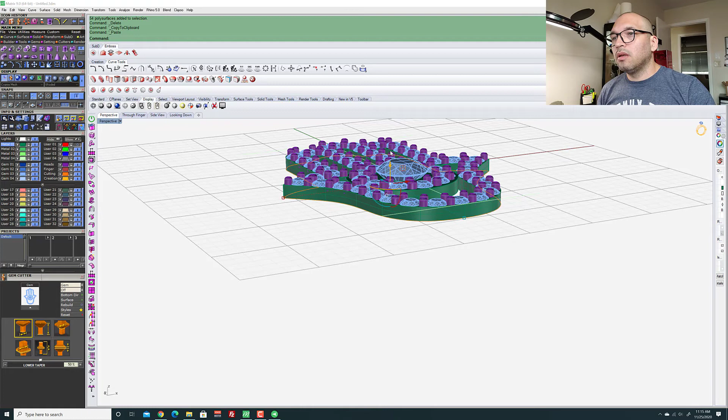So I'm gonna go Control C, Control V to copy the line. Then I'm gonna go here in this arrow and I'm gonna take -1. Okay, so we are over here in the border. Now I'm gonna let it go inside like 0.001 right there, and I'm gonna do an offset, but I'm gonna measure this one to see the thickness of this hand.

So if you have 52 or 0.50, I should make this one 0.55, because after the casting they have to polish, they have to do the pre-finish and then the finish, and that's gonna take metal, like 0.2% of metal - everything will go out of the piece. So I'm gonna leave it a little bigger because I know it's going to reduce a little bit.

So I'm gonna do an offset again here, and I'm gonna go 0.55, enter. And it's close, very close to the border of the cut. Yeah, I can live with that.

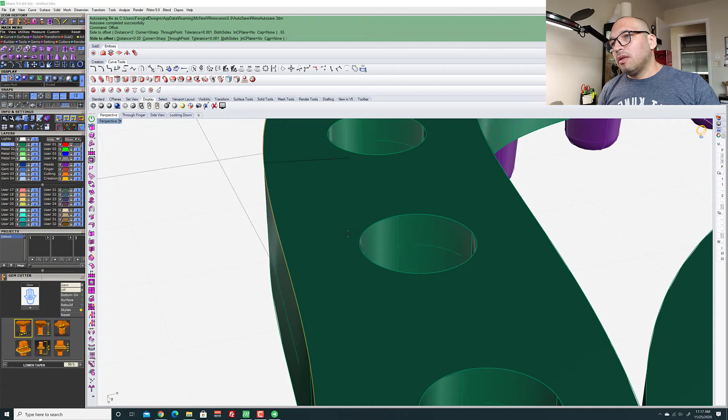You're not gonna see that because the stone is gonna fill the hole. So let's do that. There it goes. So it's right there, but we cannot see it because it's inside the metal. So I'm gonna go gold over here, and that is the line right there. And let's see what we got over here. Okay, that's nice.

So how high is this one? Let's see - I did 1 millimeter the thickness of the metal, I think. Okay, let me show you. I think it's like not too much, it's like 0.7. Okay, my daughter is here and my dog just ran away to say hi. Yeah, I think it's like 0.7.

I'm gonna leave it like 0.9, I guess - they told me that they want it a little bit bigger. So I'm gonna change this. Oh, I cleared the selection, so I'm gonna select again. So I'm gonna group these two lines, and I'm gonna make an extrude command again, and I'm gonna go minus 0.8.

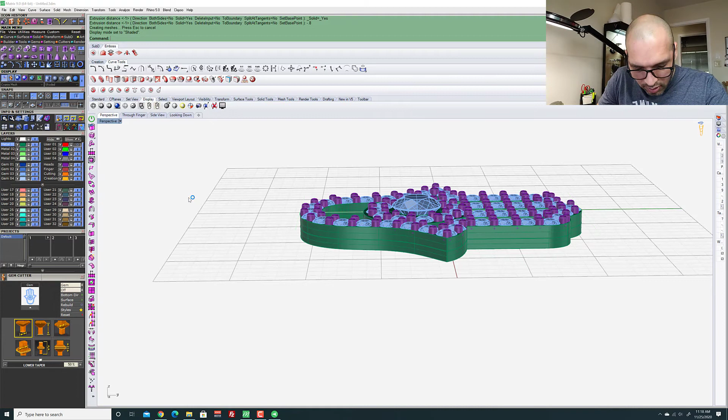There it goes. So let's shade this. We got the border. So now it's measuring 1.8 millimeters. Let me close the door because the dog is crying. Give me one second. Okay, guys.

I'm gonna measure this one to see how tall it is with the prongs and everything. This one is 2 millimeters with the prongs. Okay, so let's see how much we got in this one - little finger with the prongs. I'm gonna go to measure. I'm gonna select this one, alignment dimension.

I'm gonna go all the way up to the prong, all the way through here. I'm gonna disable near, I'm gonna press shift. I'm gonna get close over there, 235. So yeah, we're okay, we're very, very close to 198, 2 millimeters.

Now I forgot to put the prongs on the center stone. So let's go to the center stone. F6 to - when you press F6, it's gonna show you an option menu that has other commands. They're also here, but it's like a shortcut, you can say.

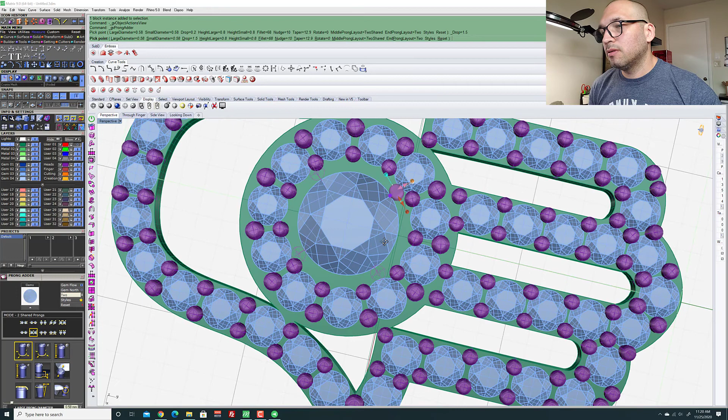So I'm gonna go to the stones menu, I'm gonna go to that, prongs. So there we got 4 prongs right now. And how big do they look in the original one? Not that big. So I'm gonna go like 0.6, maybe 0.65, I guess - 64, 65.

And I'm gonna go new 15, I guess 15%, or maybe, yeah, 15 is good. And yeah, let me see. Okay, they are between - between one stone, let me see which one. Between the - okay, one is between two stones and the other one is in the middle of the stone.

So we are good like that. The ones down here are between these two stones. I can accommodate that. Let me see the height. Okay, it's a little higher, something like that. I think I'm gonna give it a little bit more, like 0.7, 67, 65. Okay, the height - I think it's good like that. So I'm gonna press enter.

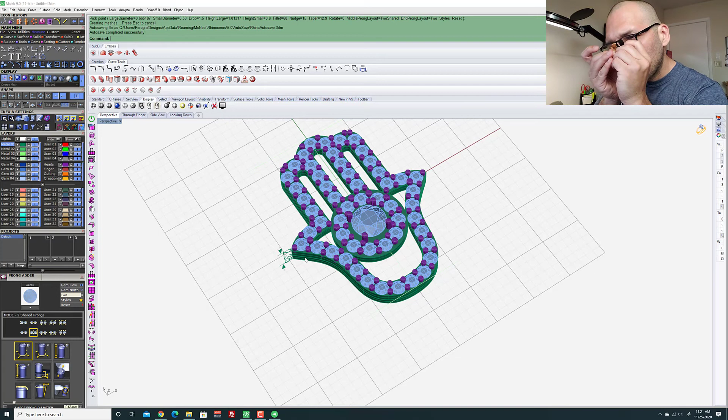Yeah, this prong looks weird. Let's see how tall is this stone over here. So yes, it's tall. Yeah, they would put the prong, the stone setter would put it, and that's it - just gonna try to catch the border of the stone.

Okay guys, so the next step is to make the ring for the bail, the part where the chain passes through. I'm gonna go to my curve tools and select the circle, go all the way down, and enable this tool to align where I want to put the circle in the center. I'll disable this and make a hole of 1.4 millimeters so the bell can pass through. Now I'll move this a little bit, and the thickness of the solid ring is gonna be 0.8 millimeters.

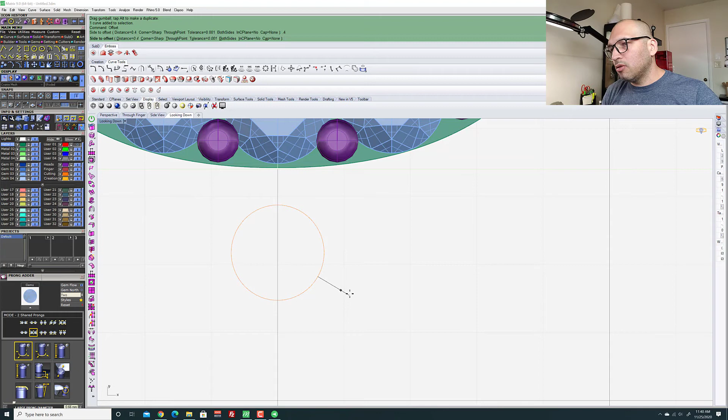So what I'm gonna do is an offset of this circle, 0.4 millimeters, the half size of the 0.8 tube for the ring. Now I'll select that curve and use the tool in the solid menu called pipe. I'll click it, select the curve where I want the pipe, and for the distance I can click on the other curve or just type 0.8 and enter to accept those measurements, and there it is.

Now I'm gonna position the ring. I'll leave it around here, not in the middle, because I know there's a lot of weight over there, and when the pendant hangs up I need it to be straight so it doesn't lean to one side or another. Always put the ring close to the part you think is heavier. All the weight here is where the stones are on the front, so I'm gonna leave it right there, a little bit inside the metal of the hand.

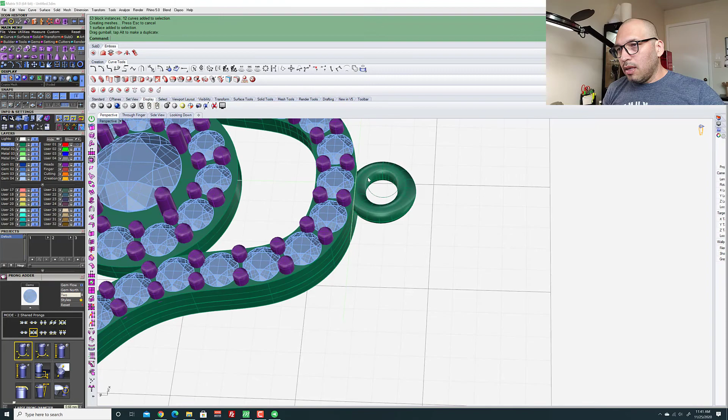Okay guys, the Hamsa is ready. I'm gonna send this picture to the client so he gives me the okay, and then I'll show you how to pass the file to STL, and that's all. You just send it to the client. This client has his own 3D printer, so I'm not gonna print it, I just have to send it by email. Give me a second, I'll take some pictures and come back with the cell phone video.

Okay, so now I'm gonna convert this to the STL format so I can send it to the client. I'm going to select everything except for the stones, and in tools I'll go to mesh repair, click it, and enter. What it's doing is creating the mesh that we're gonna save in STL format.

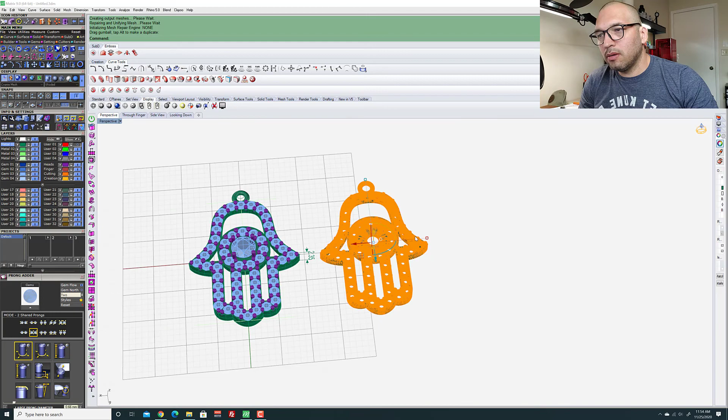This sometimes takes a little bit. Okay, I have to do the mesh, so I move the mesh from the CAD file. This is what we've got right now.

Okay, so this is ready to send by email, so I'm gonna save it. I'll select the mesh, go to file, export selected, and create a folder for my client. I'll name it Hamsa, with stones and halo, size 22 millimeters, enter. Here I'll change the file format to STL, Hamsa 22 format, that's Hamsa with halo, okay, and save.

Okay to this, and I'm gonna save all the file, control S, and go search the folder where I put the STL, Hamsa Pendant final, enter.